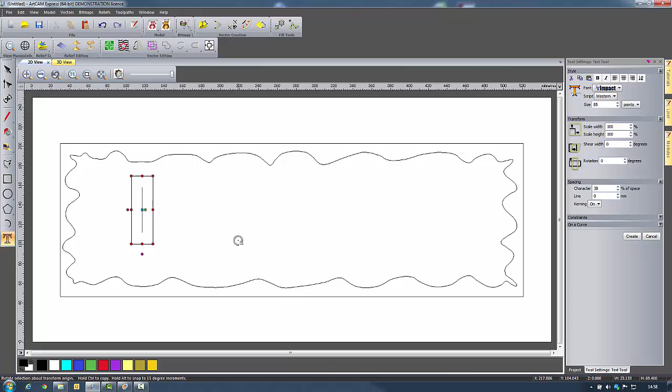Now I'm going to start creating my text. So I'll go to Create Vector Text, click somewhere in your model, and then start typing Hank's Grill. I've got the size as 85 points, character spacing 38% of space, and then say Create.

Now I'm going to open up the Transform tool and resize my text. So with the Maintain Aspect Ratio off, because I want to distort my text slightly, I'm going to input a width of 350 millimeters and a height of 85 millimeters and say Apply. Close that down, and I can centralize my text in my outer vectors. So with it selected, I can say Center Vector, like so.

Now I want to ungroup my text. So the text has been created as a group of individual vectors. So I can right click, ungroup vectors. If I deselect them now, you see that my vectors are no longer grouped. So I'm going to select all of the letters that make up the word Hanks, Control G and group them. Select all of my letters that make up grill and Control G to group them. Now I'm simply going to use my arrow keys to position them in the correct location.

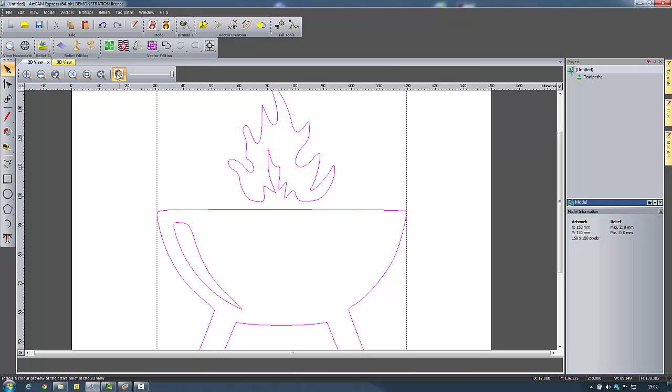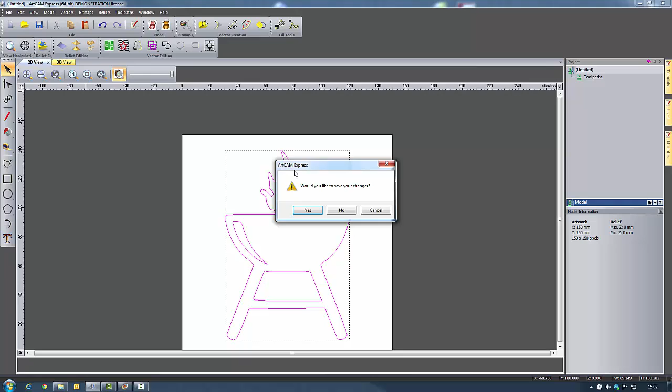Now if I toggle my image off, you can see that we've not picked out all of that pixelation from the image. So I'm happy with that, and I can say vectors, export, and I'll call this one grill.eps. Now I'm going to close this model down and reopen hanksgrill.art. I'm going to import my vectors.

And I'm going to center them in my original vectors, like so. Then I'll just nudge it along so it's in the right position. Now all I need to do is resize the grill. So select the grouped grill vectors, enter the transform tool, holding down Shift and Alt on the keyboard. So the Shift maintains aspect ratio and Alt resizes from the middle.

Once you've got your grill to the correct size, you are almost ready to start creating the toolpaths. First of all, I'm going to ungroup these vectors that I first imported. So I can do that by hitting Ctrl and U on my keyboard, and you can see my vectors change from purple to magenta. I'm going to just select the outermost vector and offset it 3 mm outwards, radius corners, and I want to keep my original.

Now I'm using this offset vector to create an area clearance, so I just want to overstep the profile by 3 mm. Now I can shift select my text so I can create my area clearance toolpath. Click on the word Toolpaths. The second one along in the 2D toolpaths is our area clearance toolpath, and we can start inputting our parameters there. So we're going to input a finished depth of 5 mm, and we can start adding tools to our list.

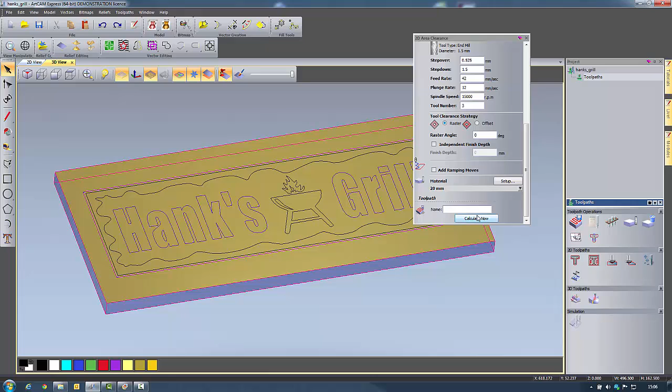We can inspect our toolpath if we want in the 3D view. So if I expand Toolpaths on the right hand side, you'll see that we've now got our area clearance toolpath. We can click on the little plus next to that, and we've got our 3 tools in there. So if I just hide the rest machining toolpaths, you'll see first of all we've got our 12mm end mill coming in and machining away most of the material. Then we've got our 5mm end mill coming in and machining where the 12mm couldn't get in. And finally we've got the 1.5 going in the smallest areas.

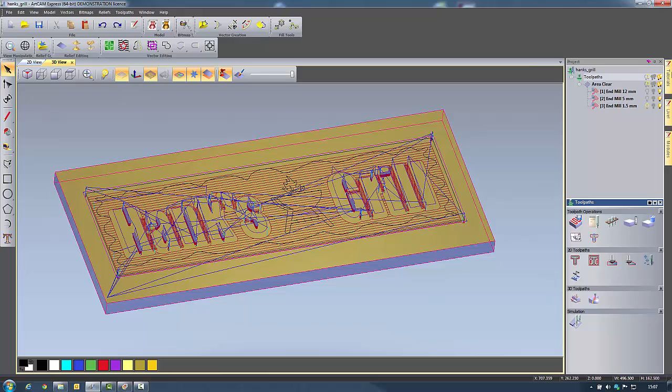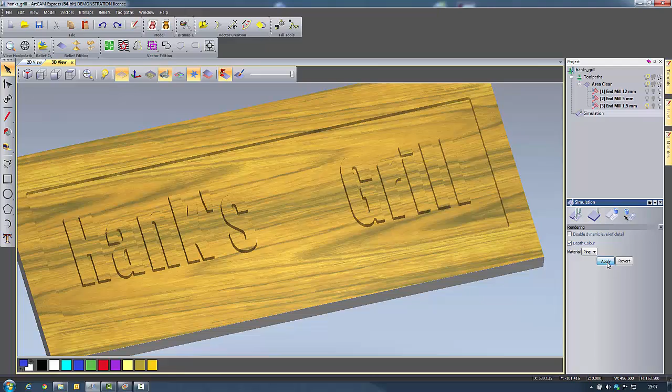So I can simulate this toolpath now if I want to. Just right click on area clear and say simulate toolpath. Now it might not be that easy to see the simulation results here, so we can click on simulation, set up the material colour. So I'm going to choose pine and apply. Slightly easier to see, but we can also choose a depth colour. So I'm going to pick dark blue to be my colour. Click on depth colour and say apply, and now you can see where we've machined away.

The next thing that I want to do is create my bevel carving toolpath. So I'm going to go back to my 2D view just so it's easier to select my vectors. I want to deselect all of the vectors I've got selected, and I'll just hide all of my toolpaths just for ease of use. So I can shift select my text, go to Toolpaths, and I can create a bevel carving toolpath. And this is because I've got the bevel carving module installed. I want a start depth of 0 and a finish depth of 2.5mm. I can select my carving tool, and that's going to be a V-bit carving 32mm at 100 degrees.

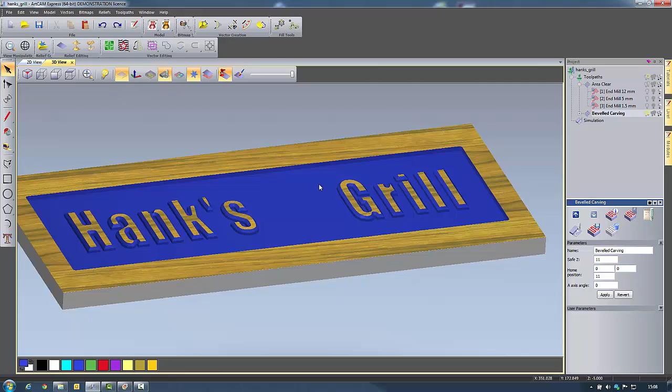And then I'm going to say calculate now. I've got a warning, and that's just telling me that my bevel will be truncated, which is part of my design, so I can just hit yes. Go to my 3D view, and I can simulate this toolpath. Now you can see where we've machined the bevel. What I'm going to do now is actually turn that depth colour off, as I don't think it's going to help us anymore. So we've got our bevel carving.

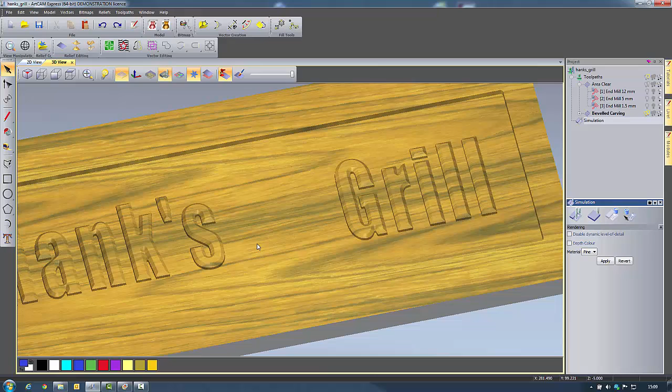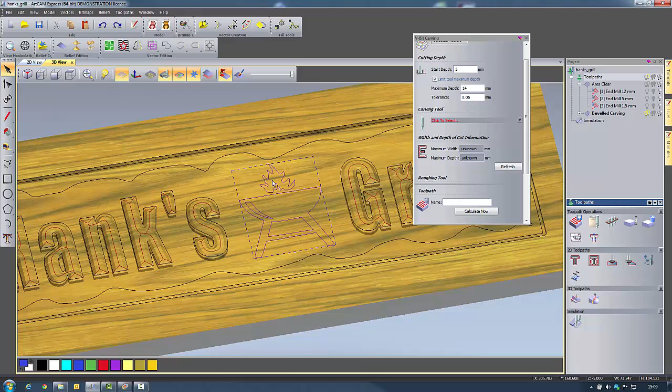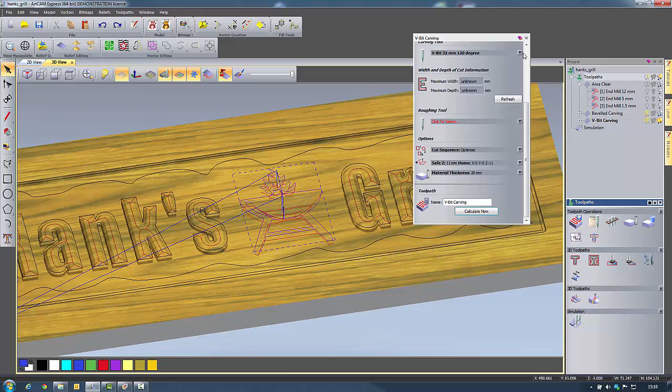Now I'm going to toggle my vectors on in the 3D view. I can select my grill vectors, and I'm going to create a V-bit carving toolpath. So I can click on Toolpaths, V-bit carving toolpath. I'm going to set there to be a maximum depth of 14. The start depth is 5 because we've already machined 5mm into the material. I can choose my carving tool, and that's going to be a 32mm V-bit 120 degrees. Now I can say calculate now. And I can simulate this toolpath.

And you can inspect that if you want. When you're happy, you can start creating some profile toolpaths. So again, toggle my vectors on. First of all, I'm going to offset my curved vector that I traced around on that original image. So with that vector selected, I'm going to say offset vector, 4mm, outwards, radius, and select resulting offset. We can also delete the original vector if you wanted to.

So now we've offset this vector, I'm ready to create a profile toolpath. So I can click on Toolpaths, create a profile toolpath. I want a profile outside selected vectors, a finish depth of 14mm, and I can choose my profiling tool. So that's going to be our 32mm 120 degree. Select that. We don't need to add bridges as we're not cutting all the way through our block of material, and I can say calculate now.

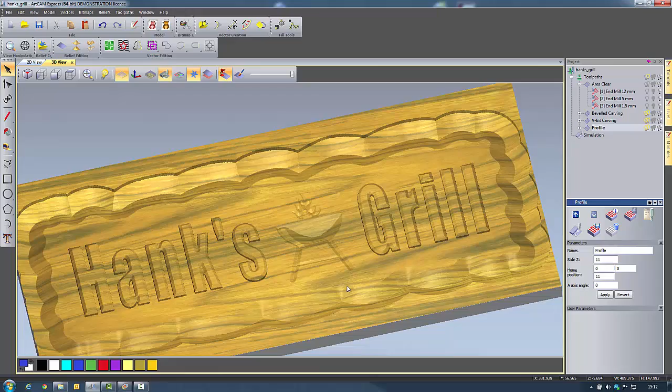So I can simulate this toolpath. And we get our result like so. So now we've got our curvy edge of our design. I'm going to show my vectors again, and I'm going to select the inner rectangle vector that we offset to create our first area clearance toolpath. And I'm going to create a second profile toolpath to cut this out.

So I'm going to go to Toolpaths, Profile. This time we want to have a finish depth of 20mm because we want to cut all the way through our block. I'm going to choose a 5mm end mill as our profiling tool. And this time I want to add bridges to hold my part in place. So I'm going to add 6 bridges with length of 10, thickness of 5mm. I'm going to have 2D bridges, and I can say add.

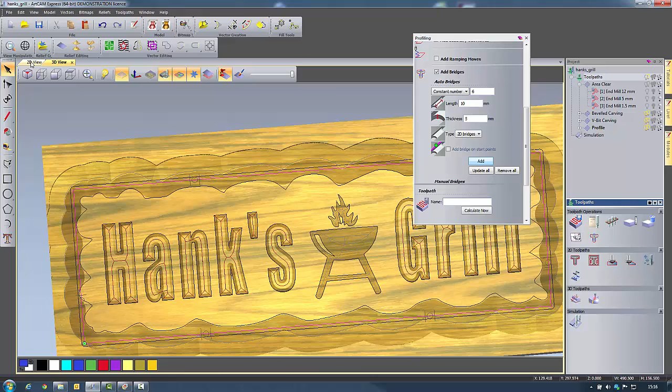Now they might be easier to see in the 2D view if I just turn the visibility of all my toolpaths off. And if they're not in the correct positions, we can edit them. So if I move down, you can see we've got edit bridges, and then we can move them around dynamically. I'm happy with where they all are, so I'm simply going to say calculate now. If I go to my 3D view, I can simulate this final toolpath. And there's my finished design.

So now all I need to do is save and export my toolpaths. So I'll click on the top level of Toolpaths, Toolpath Operations, the first icon is Save Toolpaths. And you can see here that I've got my list of toolpaths, my list of tools, and all the tool numbers. And I just need to choose a location to save them to. So on my desktop I have a folder called Hank's Grill, and I'll just create a new folder in here called Toolpaths. And in there we'll call it Hank's Grill and say open.

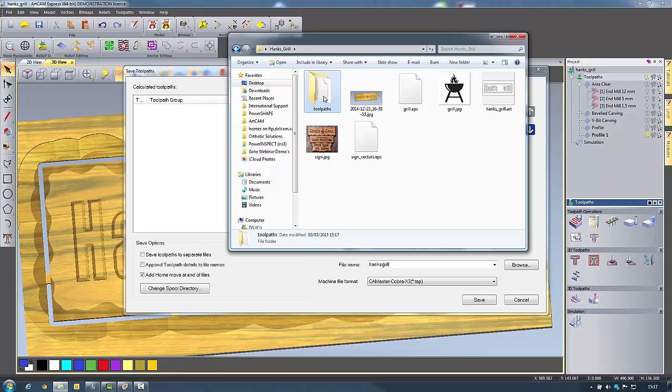Now I can choose to save toolpaths to separate files, but because I've got an automatic tool changing machine selected, I'm not going to do that. We could also append toolpath details to file names if we wanted to. So that's going to be more useful if you've got a manual tool changing machine. Once I've got everything selected and my post-processor selected, I can say save. Now when I navigate to that folder, see I've got toolpaths here, and we've got one tap file. So I can open that up in Notepad, and you can see my G-code.

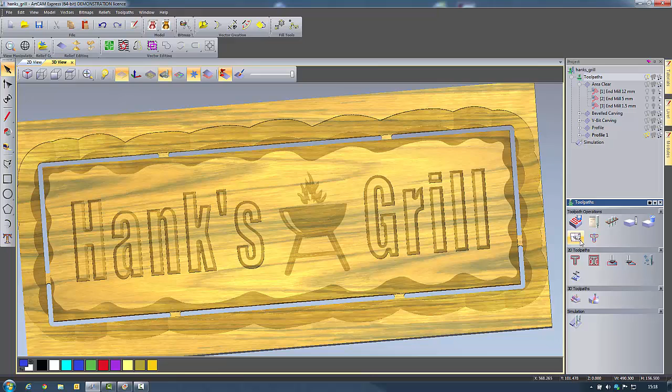So I also want to demonstrate the toolpath paneling module. So I'll just close this down for now, and because I've got it installed, we've got panel toolpaths icon available under toolpath operations. So I can select that icon. I can input the size of my panels. So I'm going to put a width of 200 and a height of 280. If I turn on my vectors there, you can see my panels created, and they're numbered 1, 2, 3. So you can choose how to number them. It's not going to affect mine because I've only got 3 panels.

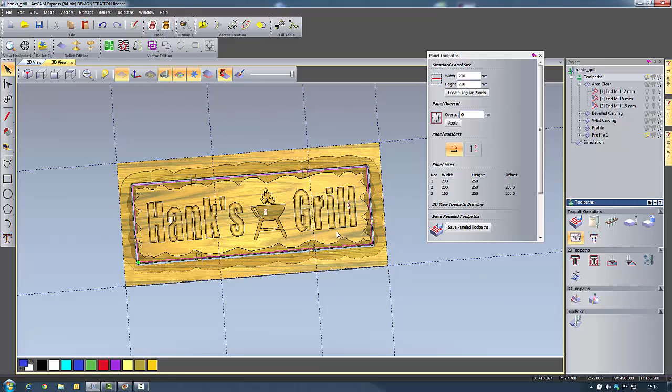And I can have a look at my bridges. So here I've got 3 bridges holding 1 piece in, 2 right on the edge of my second, and 1 on the third. So whilst in this mode, I can open up my profile toolpath. We can go to Edit Bridges. If I go to my 2D view, it might make this easier. And I'm just going to make sure I've got 2 bridges on each panel. So this is assuming the whole block of material is secured tightly down to my machine bed. So I'll move this guy over here. And now we have 2 bridges on each panel.

So my profiling toolpath, I will need to recalculate that and then close it down. And then I can simply save paneled toolpaths like so. I get the same dialog. I'm going to browse to a folder, create a new folder and call it paneled. Open that, we'll call it Hank's Grill again, and I'm going to hit save. If I navigate to that folder now on my desktop, inside paneled toolpaths, we have 3 tap files, 1 for each of my 3 panels. And again, I can open that and look at it, and you've got the G-code there.